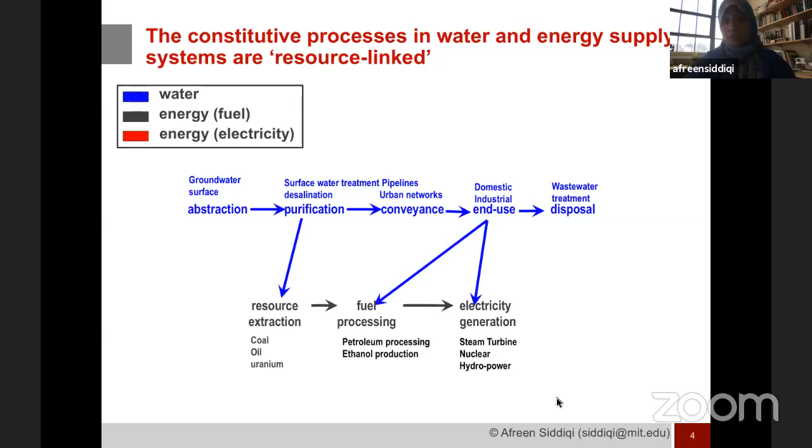I can go on - I'm not going to describe each of these in detail, but these arrows will tell you that there's a lot of linkages. Water is used for fuel processing, water is used for electricity generation, and then vice versa - electricity is used for pumping a number of processes within the water value chain, and both electricity as well as diesel fuel are used. So you can see that these two resources are interconnected, and this interconnection needs to be recognized, particularly for the future where demands for energy and water are both rising, water is a constrained resource, and population is rising, leading to increased demand. If we don't account for these interlinkages, we may institute solutions or systems that impose greater demands on another linked sector, which have not been adequately accounted for.

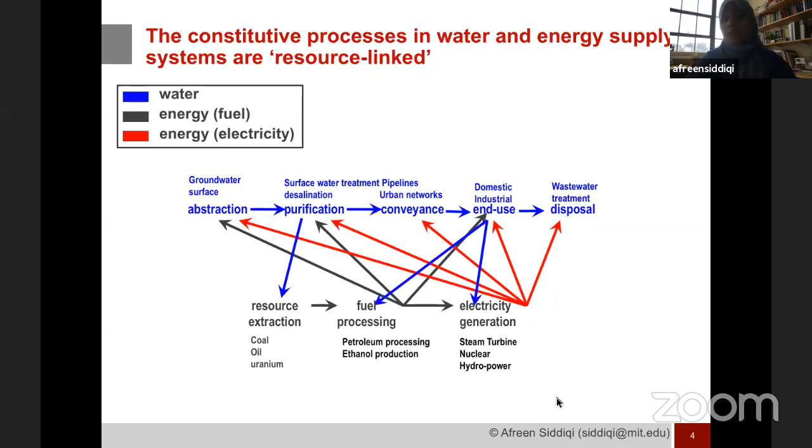So you may create solutions in one sector, but create problems in another sector, and vice versa. So this integrated thinking is very important, and this integration of these interlinkages is what we call the water-energy nexus. A lot of these issues were highlighted almost a decade ago in World Economic Forum meetings.

There was a survey done for electric power producers, the CEOs of electric companies, in 2008, and they were asked to rank issues of water. You see the red dot in the 2008 survey, and they put it in the green zone. Then a year later, the survey was conducted again, and the issue had been highlighted so much and caused enough concern that water, highlighted again in the red dot here, was put in the yellow zone, and it has stayed that way since. It has been recognized that this issue is not something that can be discounted easily.

One of the reasons why the water issue was highlighted in the energy sector was the number of heat waves, forced plant closures, and temporary halts and curtailment of power plants because of the thermal loading that was happening in rivers and waterways used for cooling these thermal power plants.

So just to back up, as I mentioned earlier, water is used in electricity generation in two important ways. It is used for cooling operations in thermal power plants. So even though thermal power plants are burning fuel, they basically need water to complete the generation cycle because it is used in an important cooling process, which is part of that generation cycle.

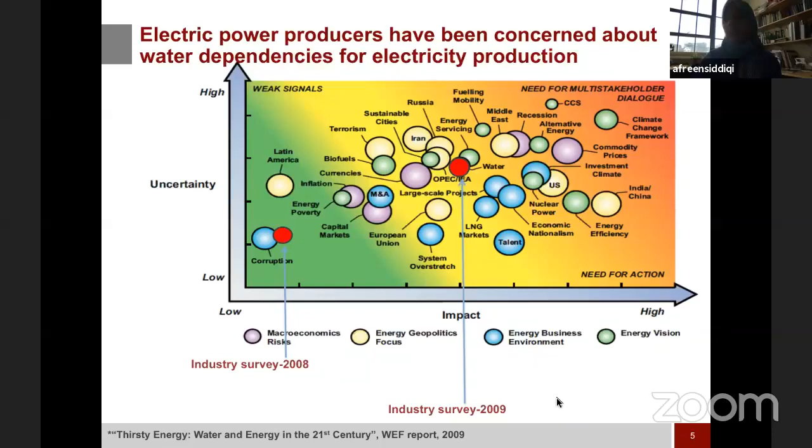That served as a wake-up call for power producers, who realized that we cannot take water resources and their availability and their state for granted. One needs to understand how the availability of water in the future might affect power generation, where it may very well be that the supplies of water itself might be lower, so there's just not enough inflows to begin with in the rivers and streams, or the water may just be hotter because of climate change and heat waves and so on. That also would affect power generation.

If you look at the water intensity of electricity generation, here's a little chart that will show you that depending on technology, the water demands can vary significantly. You can see that for some of the renewables, the water demands are minimal. So for wind power and solar PV, there's not much water that's needed.

But if we're operating steam turbines, then water is needed again for the cooling operations, as well as some evaporation. Similarly, water is used in nuclear power, again mostly for cooling operations, as well as, if you talk about carbon capture and storage, advanced coal with CCS, again water needs are great. The numbers shown here are water consumption per megawatt hour of electricity generated, and you can appreciate the great variation that exists based on the technology of energy generation.

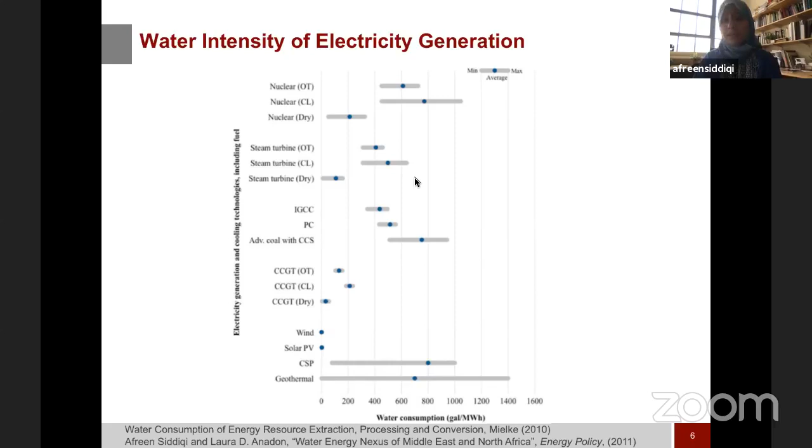So what this indicates is that if we don't account for this in energy policy, then we are neglecting an important resource, which is water, and subjecting the system to future uncertainties of water availability that could be critical in affecting the economics of the project, the productivity of the system, or even creating risks that perhaps could be avoided if better planning and consideration is done.

So water is an important resource when it comes to producing oil and coal, all the way to electricity generation. The main message is that energy policy should factor in these water use implications, particularly recognizing that although historically a region may not have been water scarce, or water may not have been an important issue to consider, going into the future where scarcity is increasing, we need to account for it.

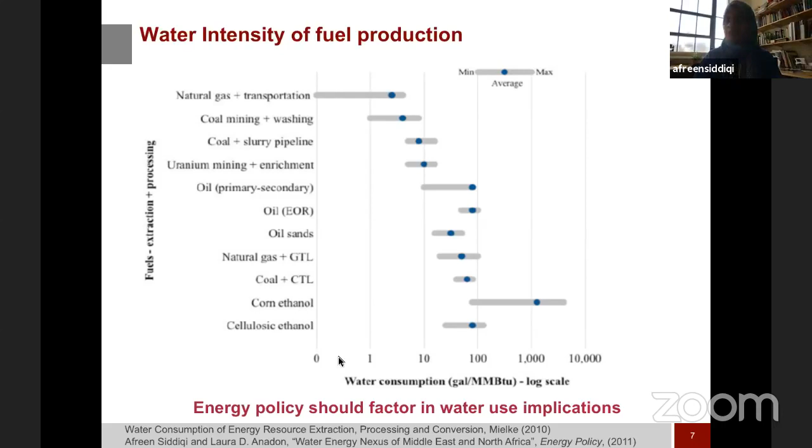Now, similarly on the other side, if you look at the energy intensity for water, we have a similar situation where, as I mentioned earlier, energy is needed to abstract water from sources, to convey it for use, to treat it, to distribute it, to dispose of it. Depending on the different processes used, energy consumption can vary significantly. When water is abstracted from surface sources, like a river or a lake, there's some kind of pumping involved. When it's abstracted from the sea for desalination, again significant pumping is involved. But typically when it's extracted from the ground, the energy intensity on a relative basis is typically higher.

Now, these are just average values. They can vary greatly depending on the region and location, but this is just to give you a sense of the scale involved and a relative sense of the energy consumption as it relates to different processes for obtaining and using water. I'll come back to this issue of the high energy intensity of groundwater later today, but I just wanted to point this out as we are comparing the energy intensity for water and water intensity for energy.

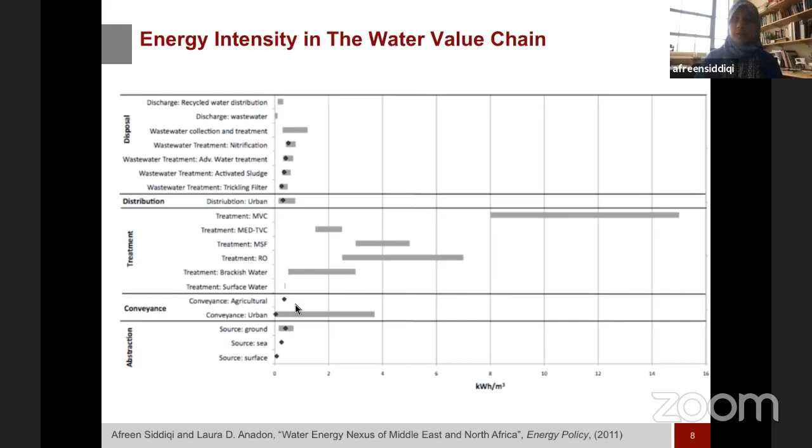So this is just to give you, I hope, a bit of background on how water and energy are linked and why it's important to consider them in an integrated way as we plan both for water resources and for energy production into the future.

So in Pakistan's context, there are a number of key and important issues relevant in the water-energy nexus, and I'm going to highlight two of them. The first one I'll start with is, of course, hydropower. This is a major part of the energy portfolio, and many people are certainly intimately aware, but let me give you a very quick snapshot of where the hydropower connection comes from.

So if you look at the Indus River, it starts in the mountains in Tibet, and I'm always intrigued every time I look at this map that the Indus River actually flows westward for a long period of time until it makes a very sharp turn, enters through the length of Pakistan, and meets the Arabian Sea after covering a relatively short distance of 3,000 kilometers. So it's literally starting from, as they say, the roof of the world, Tibet, some of the highest altitudes that we will find, and then meeting the sea, which is sea level, in a relatively short distance.

And what that then means is that it has tremendous hydropower potential. It goes through tremendous change in potential energy as it climbs down from literally the maximum heights that exist on our planet to sea level. Secondly, it is also carrying a large amount of water. If you look at the average discharge of the Indus, it is significant. If you compare it to many other major rivers of the world, you'll appreciate that it's actually carrying a tremendous volume of water. If you compare it with the Nile, the average discharge of the Indus is twice that of the Nile.

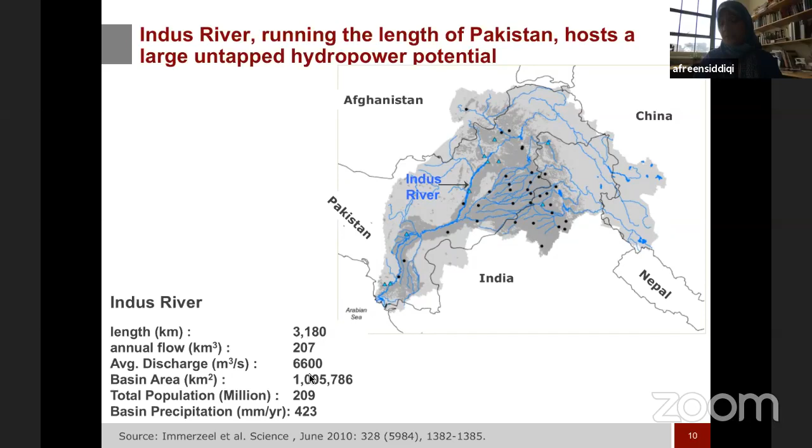With this background, the Indus has been developed for a number of hydropower projects, and it continues to host large, significant, untapped hydropower potential. There's been tremendous investment and activity in building hydropower plants. But what needs to be understood, as it relates to the water-energy nexus, is that hydropower systems are what we call long-lived infrastructure - they're supposed to operate for decades into the future.

And it's precisely those decades into the future that are going to be highly uncertain when it comes to water flows. There is still not a clear picture of what the flows may look like 30, 40, or 50 years from now, when some of these plants should be operating - or often they're evaluated for decadal performance and decadal returns on investment. So out into those future decades, it's very unclear what the flows may look like.

Particularly if you recognize what the flows of the Indus comprise of - compared with other rivers in the basin, a large fraction of the Indus flows comes from snow and glacier upstream discharge. This NMI, normalized melt index, shows the fraction of flow from snowmelt from snows and glaciers, and the contribution across different rivers. You can see the Indus stands out in terms of its dependence on snow and glacier discharge compared to other rivers.

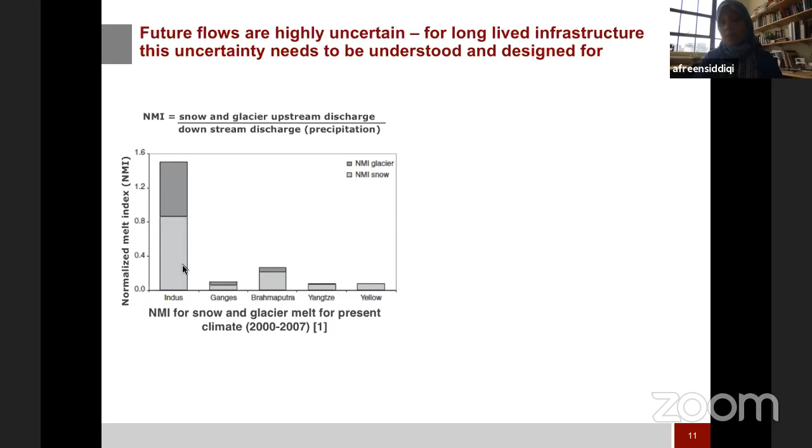What that also means is that if there is upstream change, as being recorded and observed, the change in the Indus flows is also going to be an important thing to consider. Here's a picture showing a plot from John Briscoe's report, done almost a decade ago. I don't want to dwell on the particular numbers and values, but I do want to point out the overall picture these graphs are painting.

This is looking 10, 20, 30, 40, 50 years out into the future - decades out - looking at different possibilities of percent change in the flows, depending on how much warming may or may not occur. These are all projections, and no one can say for sure what they'll look like, but you can appreciate that if any of these projections were to pan out, further out into the future the percent change is all negative. Expected flows are expected to decline, and in some cases very significantly - 20%, 30%, 40% decline, even in some cases projecting a century from now a 70% decline.

Are the systems being designed capable of responding to this change? Can they deliver value if these changes were to occur more rapidly? This is a century out - 10 decades into the future, 100 years from now. And this data is 50 years from now. But sometimes change can happen much more rapidly. As studies are being done and hydrologists, glaciologists, and experts look at this question of flows, there's significant uncertainty in what the future flows will look like for the Indus and its tributaries. This needs to be understood and appreciated.

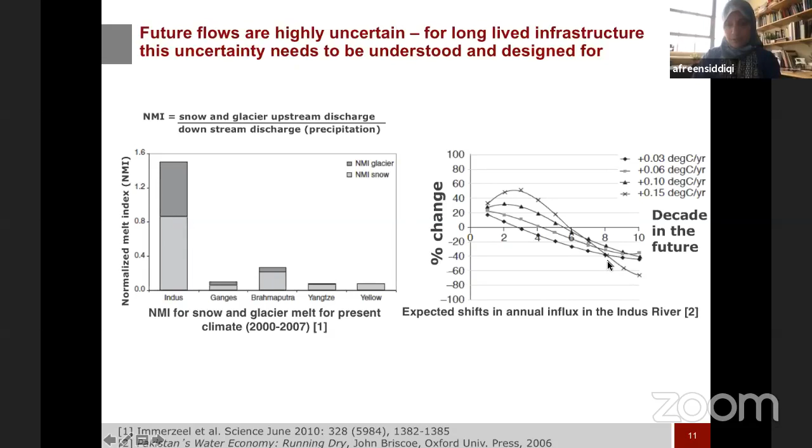Okay, trying to move my screen, but okay. So, if you look at...

Even existing systems in the Indus, such as the Tarbela power station, where arguably climate change was less of an issue and flows were more predictable - if you look at the actual generation that has transpired, it was much more variable than what was actually expected. I've plotted the average generation at the minimum and maximum levels, and you can appreciate how different they are, especially since this is for the case when supposedly flows are more predictable and there was better data, and so on and so forth.

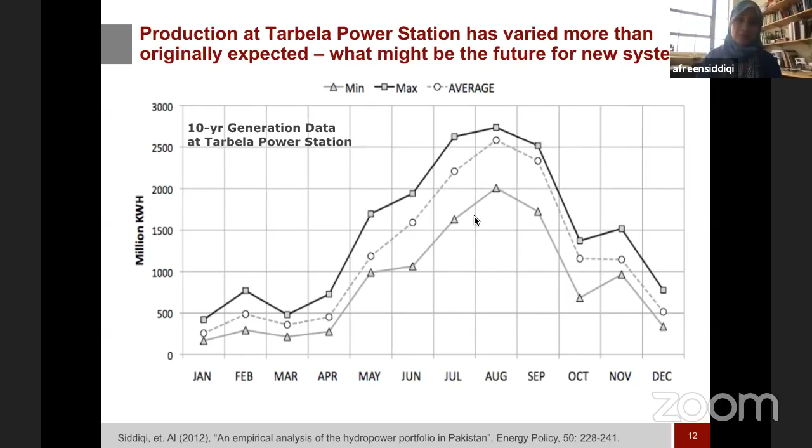So what might the future hold for new systems where there's still a lot of uncertainty? I really want to hammer on this point of uncertainty.

Currently the regime of the inflows into the system is this blue line that I've plotted here, in million acre feet. This is the cumulative probability distribution based on the previous hydrological record that currently exists. But how this hydrological record will change in the future is anybody's guess.

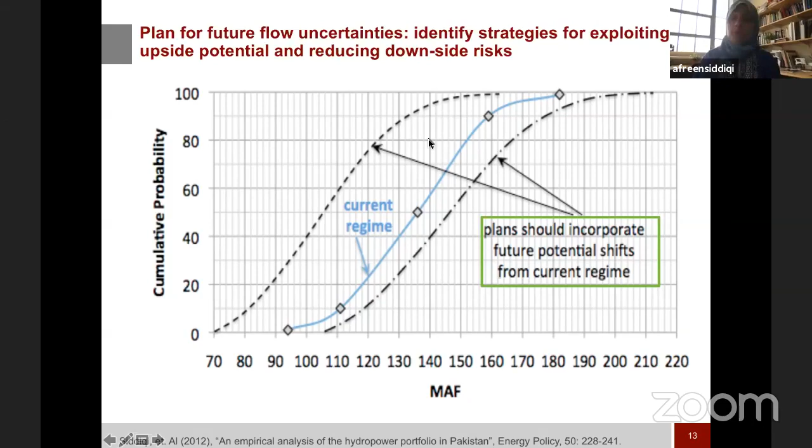The expectation is that the flows eventually will increase and then they will decline. Depending on where this curve shifts, whether there's more flow or less flow, there are impacts and implications for how projects should be designed.

One key thing that I want to highlight as hydropower systems are designed and planned in Pakistan is that there's a significant amount of focus on the capacity numbers. So, project with this capacity, and they really talk about megawatts.

But what really should be a point of discussion is how much energy can eventually be generated. It's not just about how much megawatt or the potential capacity a project has, but how much flow one might expect through it, and therefore what the capacity factor would be, and therefore the resulting energy. So we can have a very large plant, but if there's not enough flow, the energy generation is going to be very different.

Understanding energy generation is critical, but I don't see enough emphasis on this. Most of the projects are simply evaluated based on megawatts alone, and depending on the same project, as I've highlighted here.

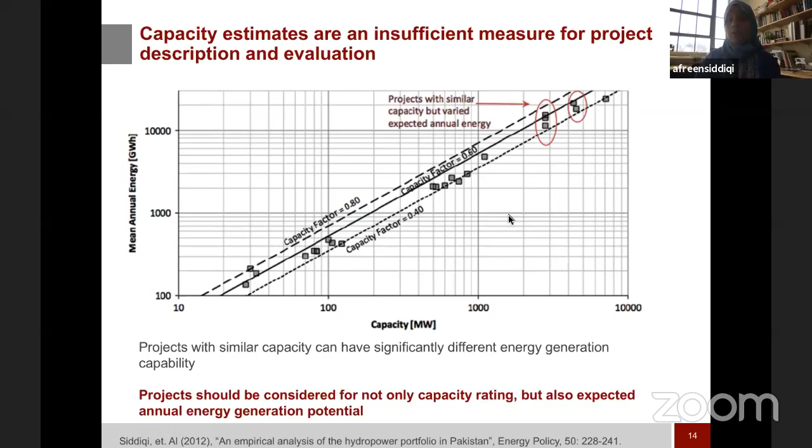This is a log scale, so as we go on the y-axis, these numbers change very quickly. Some of these projects have the same exact capacity, but we can see very different mean energy generation. So this is something that really needs to be understood and properly accounted for when projects are being funded, evaluated, and sanctioned.

Okay, so when we look at the overall portfolio, I want to show that there's great distribution that exists. There are some projects. So what I've plotted here is the number of projects, based on data provided by PPIB, the Private Power and Infrastructure Board.

There was a report published in 2004 which gave a very detailed list of potential projects, some of which have been built and many of which have yet to be built. I've sorted that data out, showing the distribution in terms of megawatts—here are some very large projects, on the order of thousands of megawatts, all the way to smaller projects, and how many there are.

This is what we call large hydro, systems that can generate greater than 50 megawatts of power. But you can see there are many, many projects that are actually kind of small, and there are different terminologies used in the sector: small hydro, mini hydro, and micro hydro.

It would be very interesting to strategically consider these small projects, because while some of these very large projects would be subject to the uncertainties I was mentioning about future flows and how much energy can actually be generated, these small projects might be very interesting ones to consider given their distribution in the country. Many of these small projects are actually further downstream, and the marginal impact they might bring to local communities that are energy deprived.

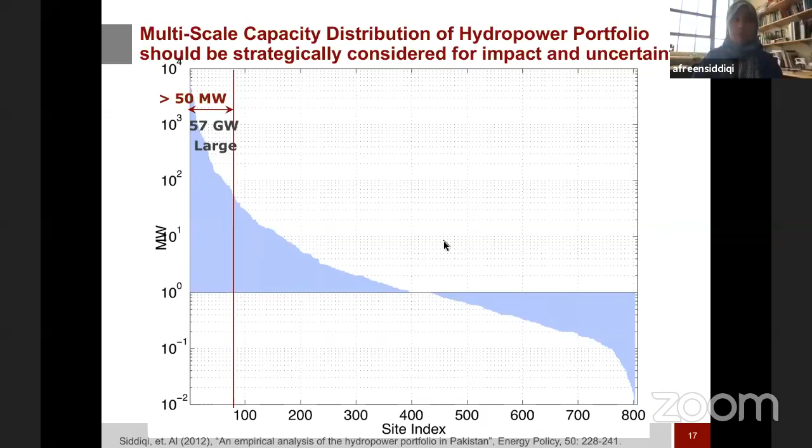I'm going to skip through this. Some of the diagrams, figures and results I was showing are summarized in work we published a few years ago, in which we did a very detailed assessment of the hydropower portfolio from a variety of different perspectives, looking at the environmental issue, the distribution issue, and so forth. Anybody who's interested is welcome to review this.

So this was one main point I wanted to make on hydropower systems, particularly the uncertainty in flows, as well as the distribution of potential hydropower systems throughout the country, and how that distribution can be interesting if you think about energy supply and its distribution around the country.

Looking at the other side of the coin of this water energy nexus, I'm going to talk about groundwater pumping, where we use energy to basically extract and use water.

If you look at the Indus Basin, I really like this picture, drawn by the Food and Agriculture Organization, FAO, showing the percentage of irrigated land as a percentage of area. You can see this big, long red zone here - a large part of this is Pakistan, and also Northwest India. If you compare it with the global map, you'll appreciate how intensively irrigated our country is compared to the rest of the world.

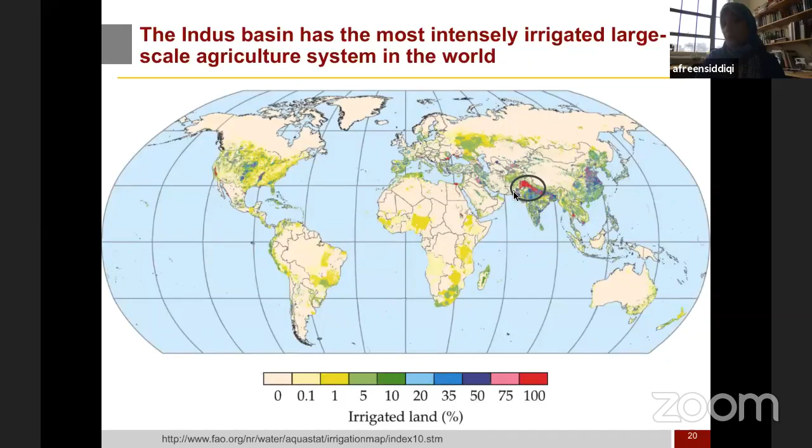And how is this irrigation happening? Well, it is happening through a network of surface canals that have been built over almost two centuries, and serve to irrigate tens of millions of contiguous acres in the country.

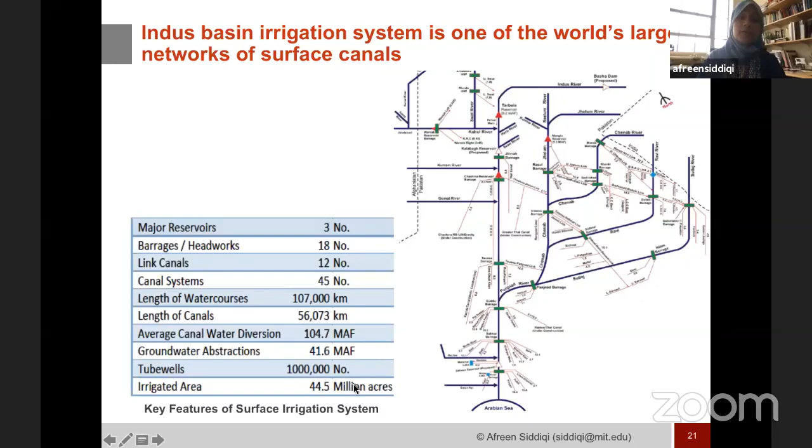But if you look at the surface irrigation system, the canal withdrawals over time have actually been declining - you can see these negative numbers here. I've plotted the average trend over time, and you can see that total withdrawal has been declining over the past decades. So how has agriculture been able to keep up when water withdrawals through the canal system have not increased, but actually decreased overall?

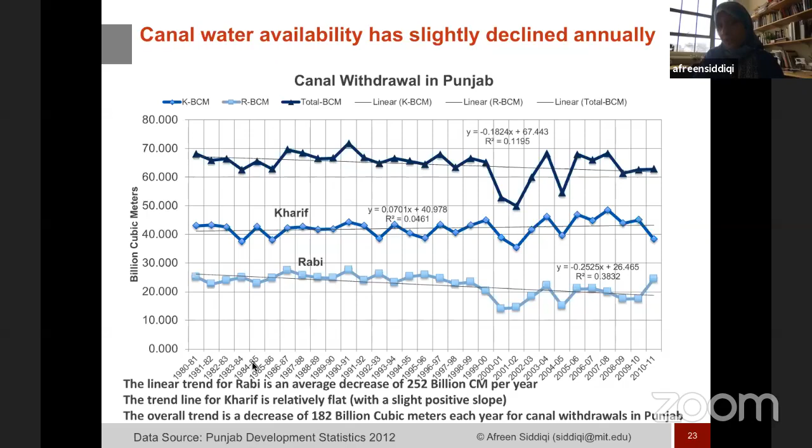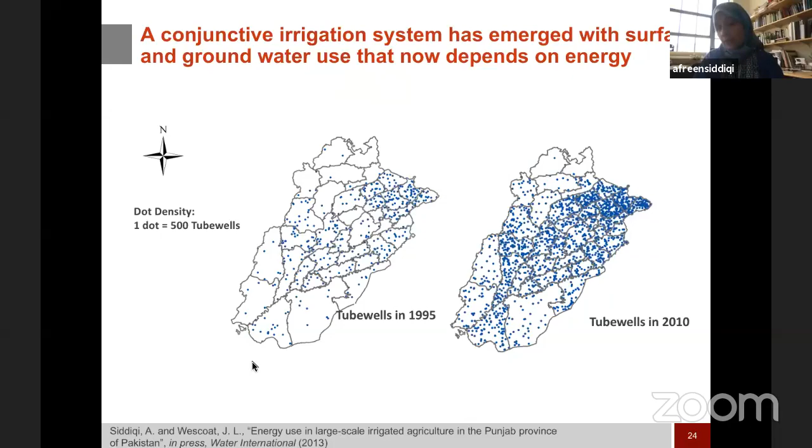I'm showing Punjab here because this is where the major agricultural production is happening. Certainly Sindh has significant production as well, but I'm showing Punjab because that's where I was able to get the data most easily over a long time series. This is data coming from Punjab Development Statistics - officially reported data - and you can appreciate this growth in groundwater pumps over decades.

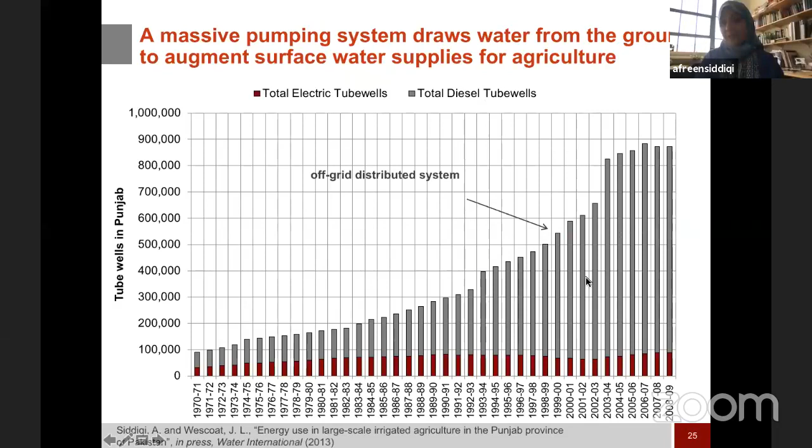Something wasn't adding up, because we started this project to quantify how much energy was being used for pumping and in the agricultural sector. But when we looked at the reported data, it just didn't add up, because diesel use is reported to be declining over time, while year after year diesel-based pumping has been rising. So how can this be?

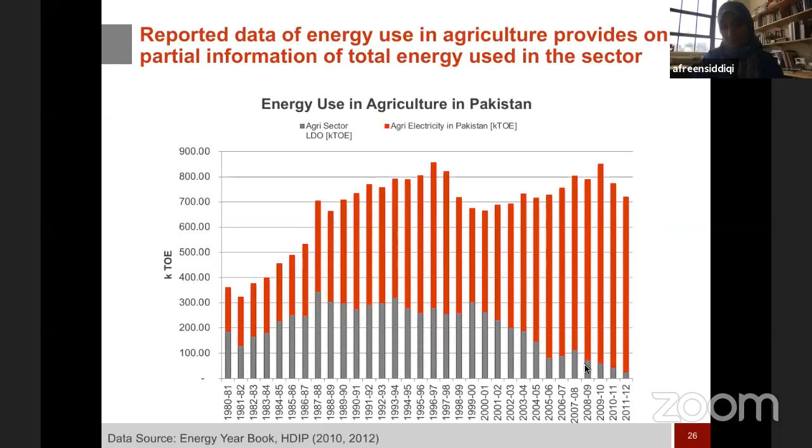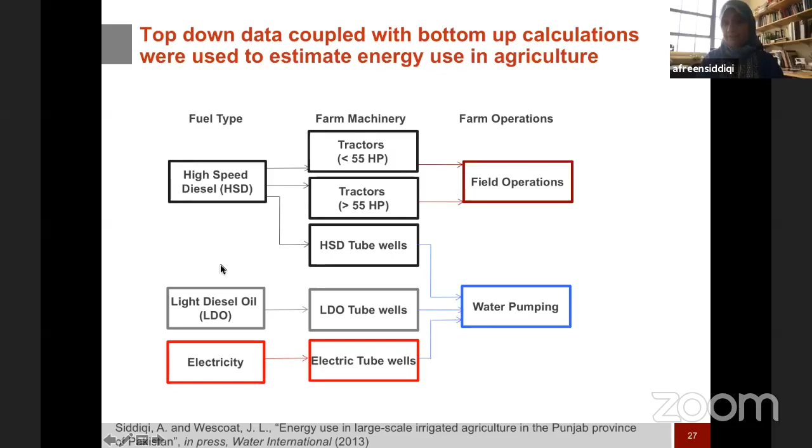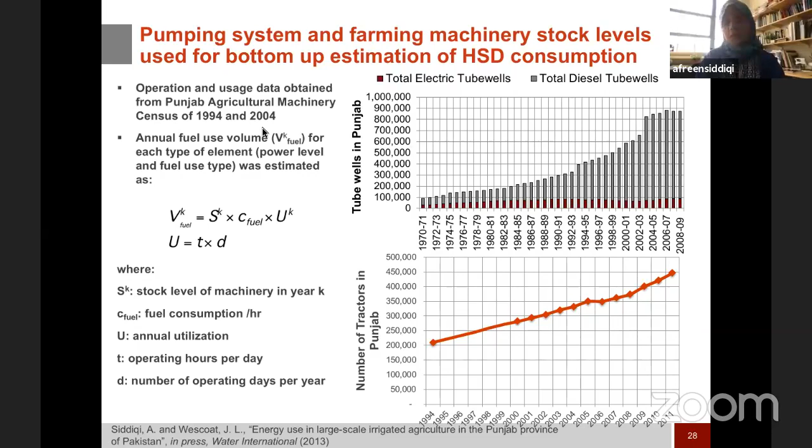So we decided to do our own analysis and built a simple model at the farm level, looking at the machinery being used - different types of tractors, tube wells, and different fuel types: high-speed diesel, light diesel oil, and electricity. We mapped out the different operations each was used for, then collected data from Pakistan's agricultural machinery census for Punjab, which is done every 10 years - we got the census for 1994 and 2004. That census provides an incredible amount of information on the type of machinery being used, and based on that census and our basic calculations, what we found was...

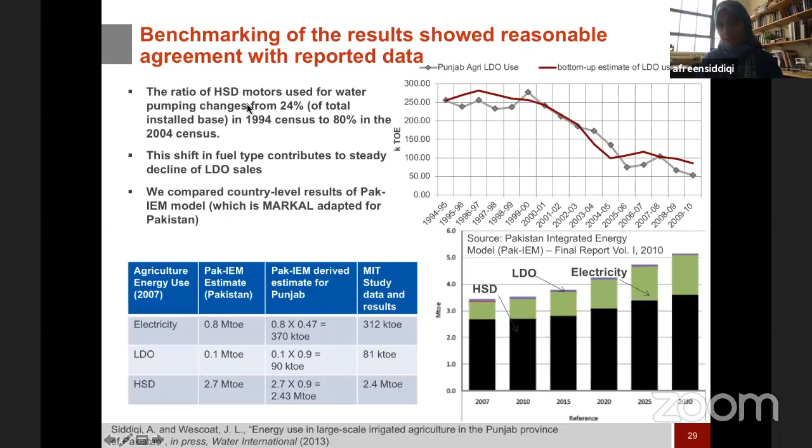What has happened is that a lot of the pumping is now happening through high-speed diesel, which is simply not reported in the energy yearbook. So there has been a shift of fuel type from light diesel oil to high-speed diesel for groundwater pumping in the agricultural sector. But the high-speed diesel oil continues to just not be reported for agriculture, and that is why we see a declining use of energy in the official numbers, which only reports LDO - HSD is simply not reported for agriculture.

Based on our own calculations, if we include this HSD, high-speed diesel, which we were able to do using the machinery census data showing us which pumps were using HSD, you can actually see the energy for pumping has risen significantly over time. Some of these jumps you're seeing are actually drought years, when a significant number of additional pumps were added onto the system. Field operations for tractors and so forth are ongoing, but pumping constitutes a significant use of energy, and that's the connection.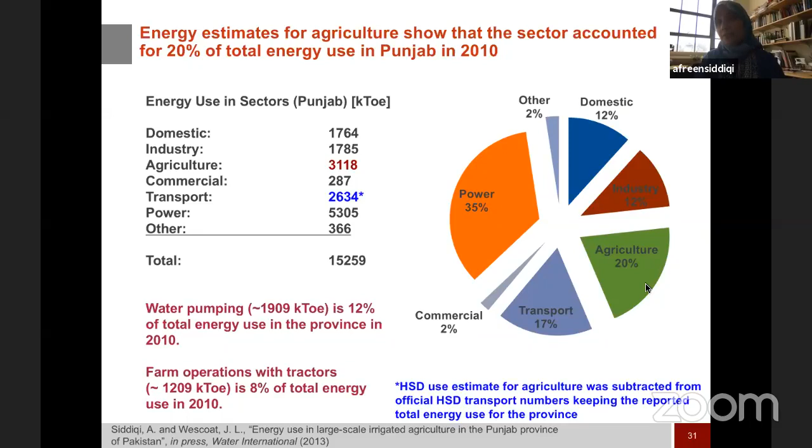So 20% of the primary energy use in the province, we estimated, was going into agriculture, which in some sense is not surprising - Punjab is a big agricultural province. But if you look at the officially reported data, it says only 3% goes into agriculture. So what is right? What is not right? The issue seems to be one of bookkeeping.

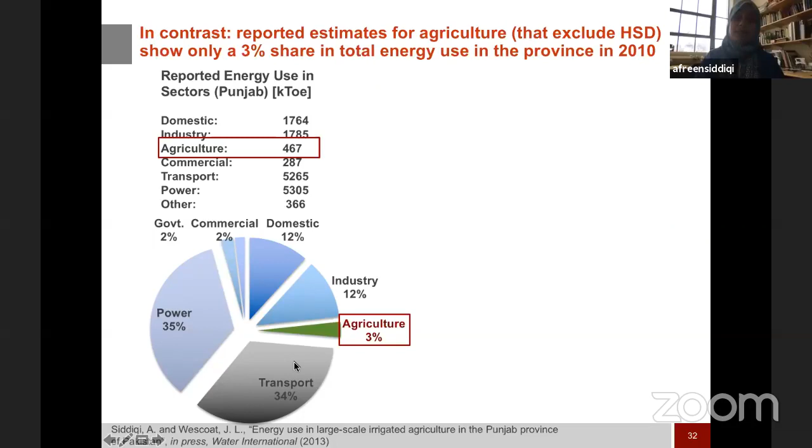As I mentioned earlier, light diesel oil is reported for agricultural use, and if you only look at light diesel oil, agriculture doesn't account for a whole lot of primary energy use. All of that HSD, the high-speed diesel, is bookkept in the transportation sector - so the transportation sector has a significant pie. But if we carve that pie differently and attribute that high-speed diesel to agriculture, which we're doing based on the machinery census numbers, then agriculture's share will increase and transportation's share will decline.

Now, this is just an estimate. For a better estimate, what will really be needed is some field testing and field data, specifically collected for this particular question. But what we wanted to highlight through our study was that there are significant knowledge gaps that exist currently, and significant issues in how data is being reported currently.

It's a matter of bookkeeping. High-speed diesel is reported, but it is being bookkept in the transportation sector. Whereas what we found, based on the machinery census, is that a lot of diesel groundwater pumps are using HSD, and when you account for that, agriculture's share of energy increases. So something needs to be fixed here, both in terms of data reporting as well as getting a true picture of the energy consumption for water.

Our estimates show that it is far greater than the reported 3% for sure. This needs to be understood and looked at in more detail to get a proper accounting, because these are just estimates based on the best data we could find, but better measurement and data collection can help resolve where the situation stands. Certainly it is more than 3%, and whatever that is needs to be understood, because it means a significant amount of energy is used only for abstracting water for agriculture.

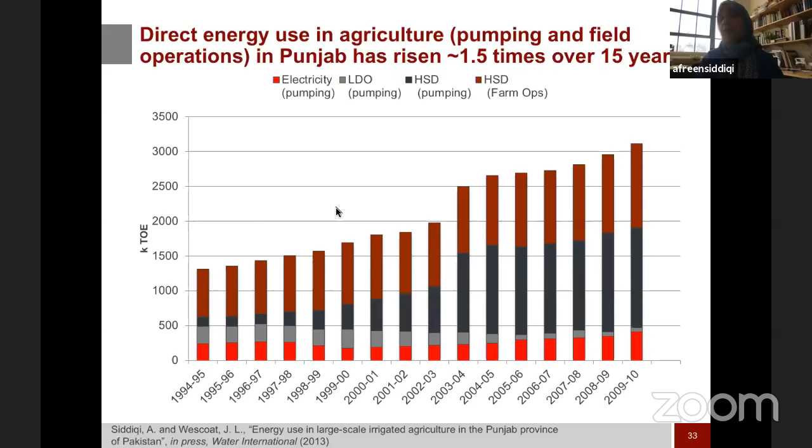Now, using our estimates based on the model and the data, we find that direct energy use in agriculture has risen 1.5 times in Punjab. So to produce the same amount of output, we are putting in more energy. To give you a sense, this is a gross measure, but if we look at agricultural production, direct energy intensity has increased from 1 megajoule per kilogram to 1.86 megajoules per kilogram. So to produce the same kilogram of output, we have to put in more energy.

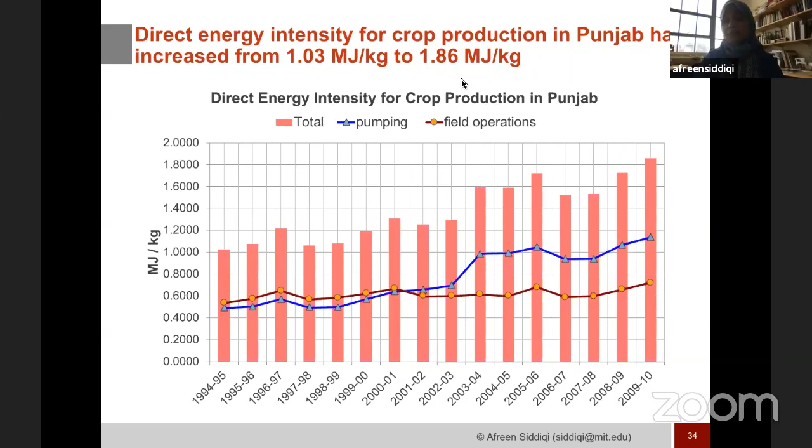A lot of it is driven by groundwater pumping, because we have to mobilize all this water from the ground to bring it up to create the production levels we're seeing. This has grave implications. It needs to be understood and appreciated how much pumping is impacting the energy use for agricultural production.

A lot of these results and the details of the model were provided in a paper that we published in 2013. For those who are interested, you can take a look, and all the data sources derived from officially reported data are also referenced in that paper.

So how do we address this issue? As mentioned, groundwater pumping is related to a significant amount of energy use. One common response is looking at solar power pumping, where instead of consuming diesel, we can use solar power pumps. To some degree that is possible, but solar power pumps continue to be fairly expensive. Secondly, they can lead to other issues, such as people pumping indiscriminately and creating further over-abstraction of the groundwater resource. So solar power pumping is not a silver bullet—it has its own issues, both in terms of cost and the potential pitfalls of over-abstracting groundwater, because now there's no cost for energy, so people will pump even more, creating unintended consequences.

Here's another solution that might be interesting for Pakistan: small hydropower, where small hydropower systems, perhaps in the canals and waterways, can provide electricity both for limited groundwater pumping and other agricultural uses in rural areas. This again connects our water and energy planning in an intimate way. This is very real for Pakistan, because there's a very extensive network of canals—some almost as big as rivers in their own right, with a tremendous amount of water flowing through them. Can these canals be harnessed not only for delivering water on the surface, but also for generating a small amount of hydropower that can be distributed locally and used for agricultural operations? This would reduce diesel consumption.

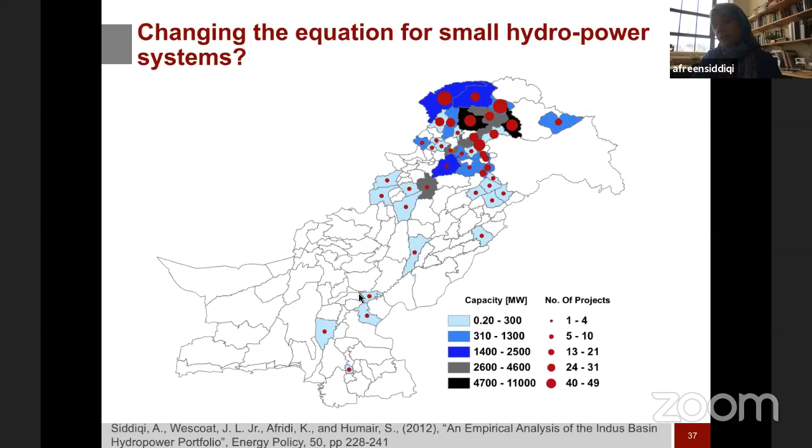This would create cheaper, cleaner energy, and provide energy where perhaps there's just not enough electricity to begin with. So this is an area that can certainly be looked at in detail in Pakistan. It may not be possible for all types of channels, as some are very small, and it will impact the flow distribution because as we extract energy from the flowing water, it will impact distribution and so forth.

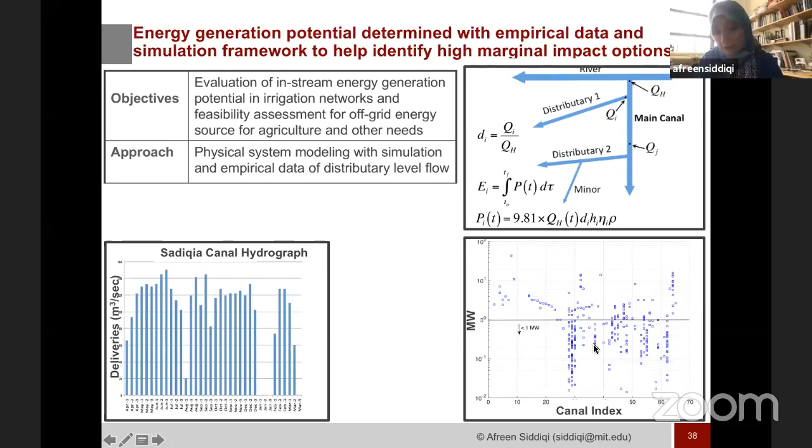But this is something that can be studied. There's certainly plenty of large channels that can potentially be analyzed. So here's some early work we started looking at, on energy generation potential on major canals in Pakistan. You can see some of the canals plotted here just by an index, and the megawatts of capacity in terms of different sites that exist on these canals, on which small hydropower systems can potentially be installed.

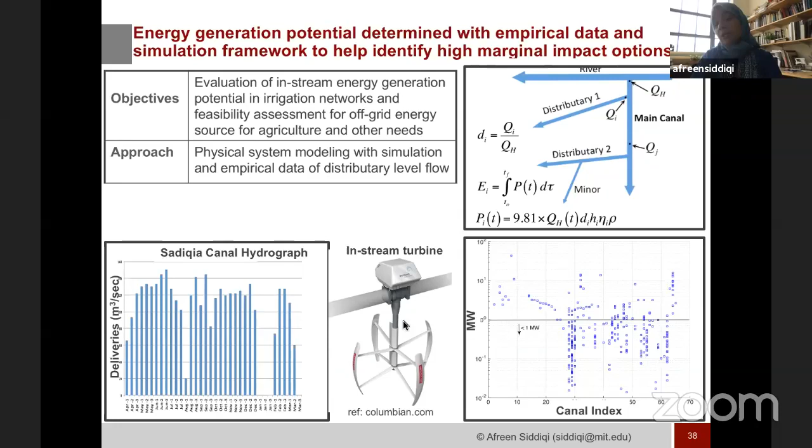Here's a picture of an in-stream turbine. These are special types of turbines that harness flowing water. They are not the regular types of turbines that require water to be falling from a significant height, but rather they harness the kinetic energy of flowing water. So there are all different types of turbines and technologies now available that can be considered for use in small-scale hydropower production in the different waterways in Pakistan.

So with this, I will wrap up, and I just want to highlight some key takeaways. One is that I didn't really call it the water energy food nexus—some people do in Pakistan—but it really is the water energy food nexus, because most of the water we're talking about is really used for agriculture. Nonetheless, water, energy, and the third dimension of food need to be considered as connected problems. For Pakistan's case, there are two key things I want to highlight.

One is that it's really important to identify and fill critical knowledge gaps. The more I've studied this problem, the more I've realized how little is known, which I think is needed to better inform policy and design. And what is known has significant gaps. I illustrated that example in our little project where we were trying to quantify the energy use in agriculture. So some of these issues really need to be addressed.

Secondly, once we build our knowledge of how the water and energy systems are interacting, that knowledge should be used to devise strategies and inform decisions. Whether we are informing decisions for funding hydropower projects—how are the economics of the project going to be affected if the flows are significantly different, how much energy can actually be generated—it's good to have large capacity, but if there's not enough flow, we're not going to get the expected energy generation. So how are we accounting for that? Is it adequately accounted for in the net present value calculations, or the return on investment calculations, or whatever other metrics are being used? Is that uncertainty adequately reflected?

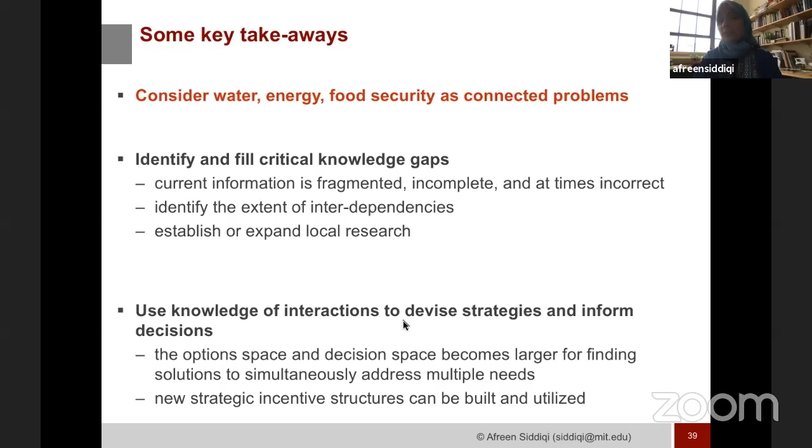And similarly, how can we harness the full portfolio and not only focus on the large systems, but also on the small systems, to perhaps address some of these water energy interconnections that are intimately connected in the economy of the country? So with this, I will end, and I'm happy to take questions.

Thank you so much, Dr. Siddiqi. This was absolutely amazing to just sit here and learn from you. You're very right—even though I consider myself a little knowledgeable, considering I'm doing a PhD, I had absolutely no idea about all these things that you mentioned. So thank you so very much.

We would start the question and answer session, and I'd like to start with a question of my own. You mentioned a temperature increase would relate to a decrease in the output that we have in the water energy nexus. Could you shed some more light on this—considering what we know about how severely climate change is about to impact Pakistan, what do you anticipate in terms of generation and the water energy nexus in that aspect?

No, that's a great question. A number of research groups have actually looked at this issue of curtailment—curtailment meaning that power production has to be reduced from existing power plants because of various constraints.

A number of research groups have looked at this issue of curtailment in power generation because of thermal loading. Because of climate change, the average temperature is expected to rise, and there can be intense or severe events where temperatures spike for a few days, called heat waves. In those situations, what would that do to power generation? Because cooling processes become inefficient, you can't generate the same amount of power as you would with colder water to begin with.